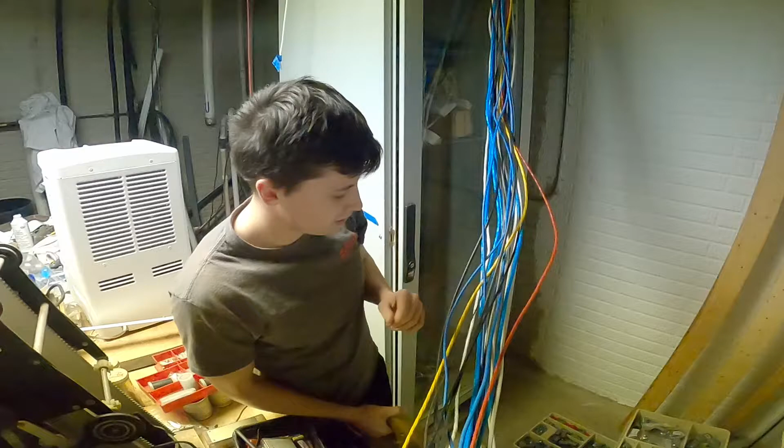I promise I know what I'm doing here.

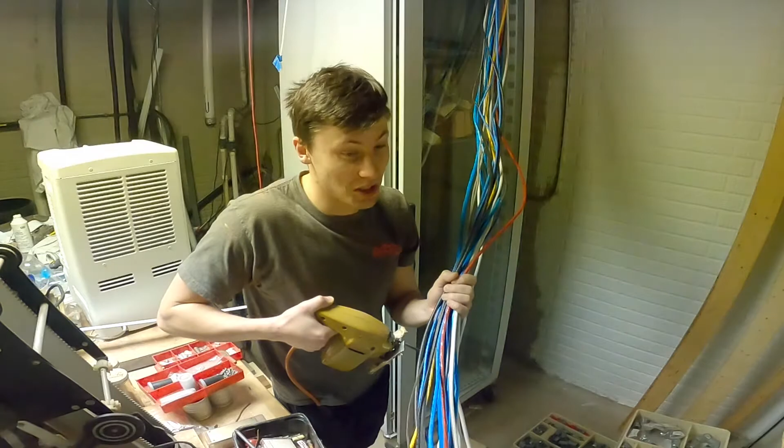Okay, so we're headed down to the basement, coming down the stairs.

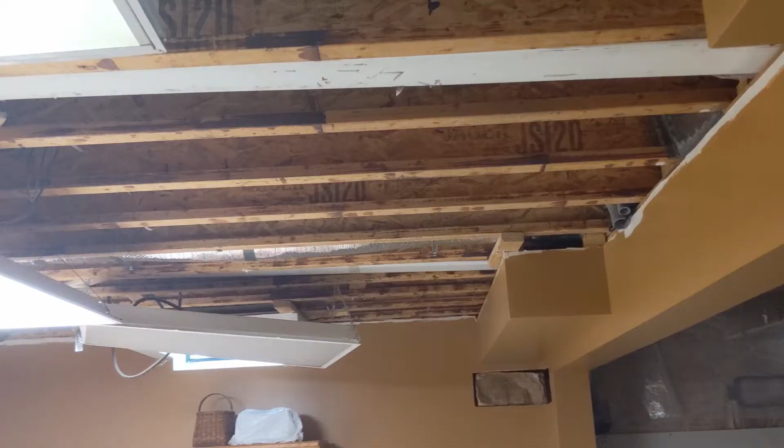We've finished about half of the basement, or most of it. We don't have the ceiling figured out yet, but the walls are all done, and all the conduits are run for speakers in the walls. We haven't finished this back half, so this back half is a disaster.

But what we came here to see is this heap of cables, and the sump pump. We'll talk about that probably eventually.

So this has got our home audio system. That whole rack, the server rack, will eventually make its way to there, and this slot, as you can see, we've kind of framed it out so that can slide in there.

So there's audio cable run to most of the first floor, but my dad wants to run cable all the way up to the rooms on the second floor.

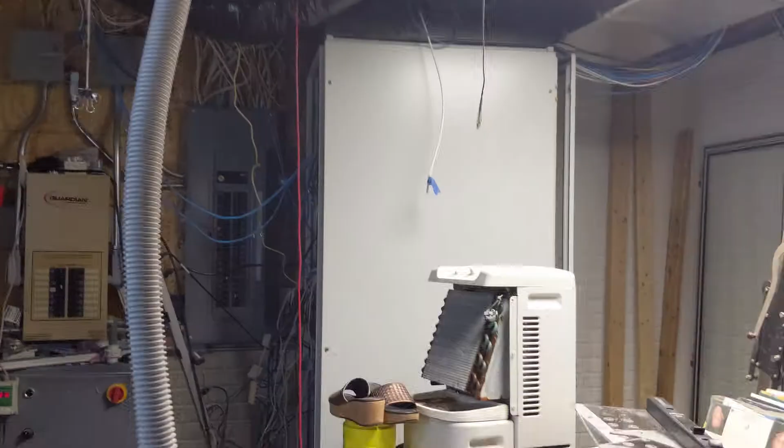So we essentially have to have a conduit that runs from this box on the ceiling all the way across the basement, keep coming all the way through here, and then poke up through the ceiling. So I'll show you a little bit why and where that's gonna go.

What's up guys, we are back in my sister's room. We're gonna figure out where in this closet we need to take out the drywall, and also do a little bit of work to prep for my dad, who's working on the shelves in here. So we're gonna be prepping for that.

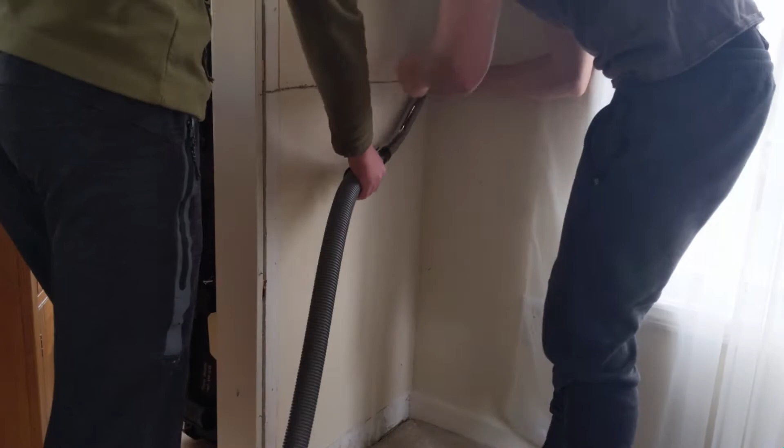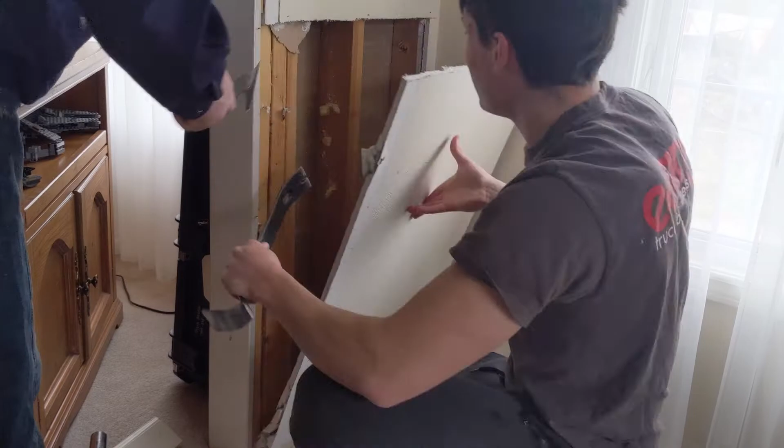So just like that, we got this wall cavity opened up, and we're gonna have to end up drilling holes in here, and that's where we saw in the basement down there, where that's gonna come out by that joist.

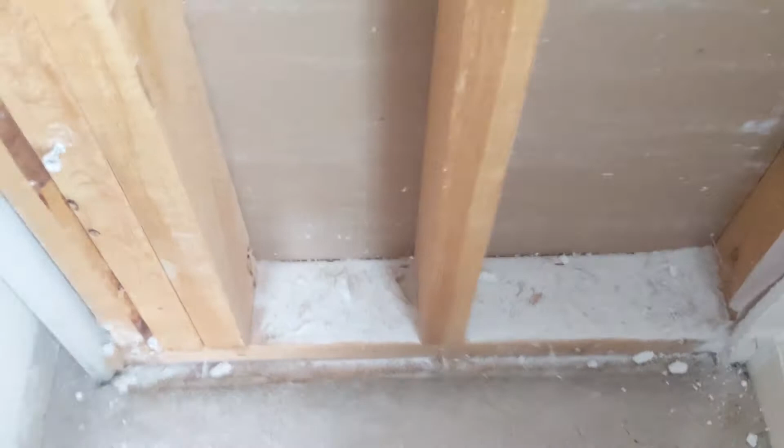So the I-beam should be right about here, right under us. We won't actually be able to see that until we drill, but that's where we're gonna be poking out. So should be good, and then we'll run all the way up into the closet up there.

So these are the shelves. It'll be pretty, this will be in the center of the closet, so I'll have some nice storage space in the bottom. You can see there's a bunch of holes, so you can have different shelf heights and adjust them to however you need. So that'll be pretty cool.

The bottom is deeper, this goes almost to the full depth of the closet. I think the doors will be about here. This is cut so that you can reach your hand in, this will allow you to get to the hanging stuff.

So I think he's planning on having two hanging poles here for hanging clothes, for just like your t-shirts, your pants, and stuff like that. And then having a longer one here for dresses and stuff like that for her. So it'll be pretty sweet.

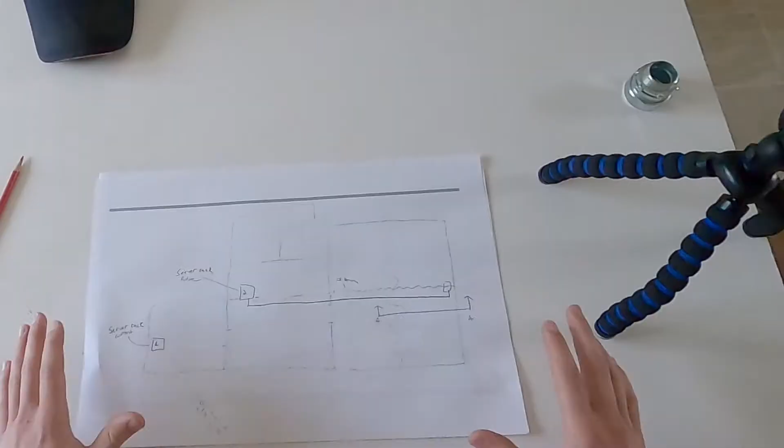We're kind of doing this now, the whole closet and everything, and poking open the home audio conduit stuff, because we're already poking through the walls. It's something my dad's been looking at doing, running into the attic so it can get to all the different rooms.

Got a quick drawing to kind of show this project a little bit. This is the floor plan for the basement. We go back to the server rack, which is what I showed before.

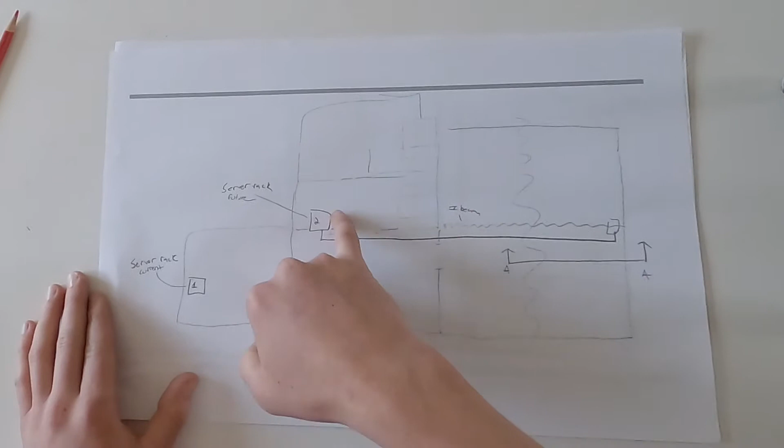Where it is now, and then we're going to move it to here eventually. So we need a pipe essentially to run Ethernet cables and audio cables from this server rack all the way to here, and then that's where it's going to poke up and go upstairs.

So we come to the basement here where I was showing. This here is where it's going to turn and make a 90 up. Each one of these dots is representative of a coupler.

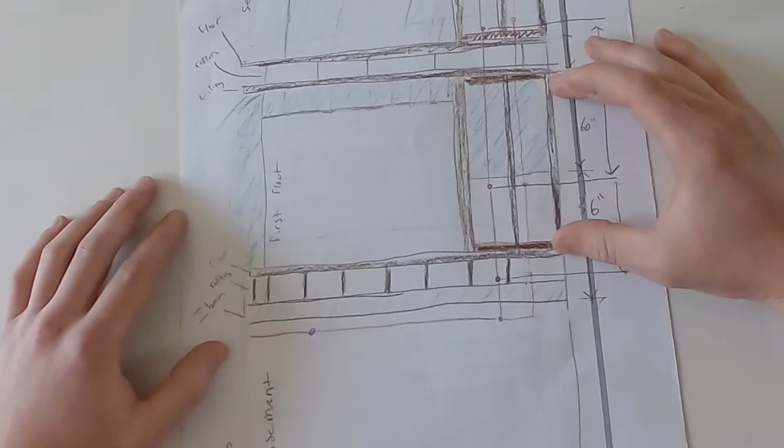We have the first floor. This is the part of the wall. This is the 3-foot section that we have the drywall off of. And then this is my sister's closet here with the section of drywall we have out currently. It's like a 7-foot section.

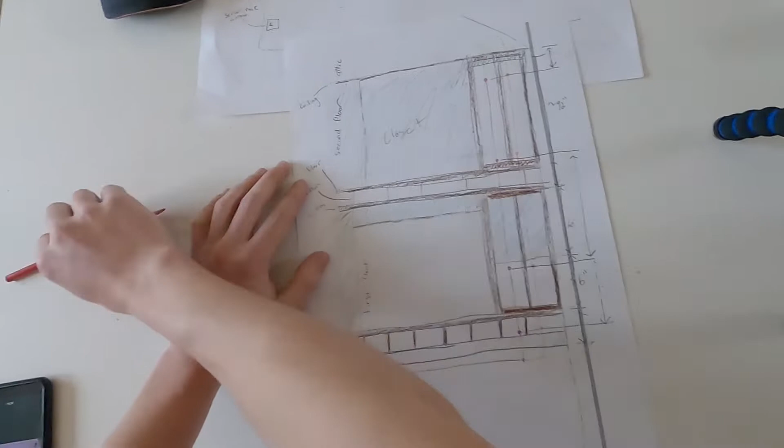I have some measurements, I started to take some, but just to get an idea, from the basement we're going to have that conduit running several different lines. I actually think we're going to have enough space to have another run here.

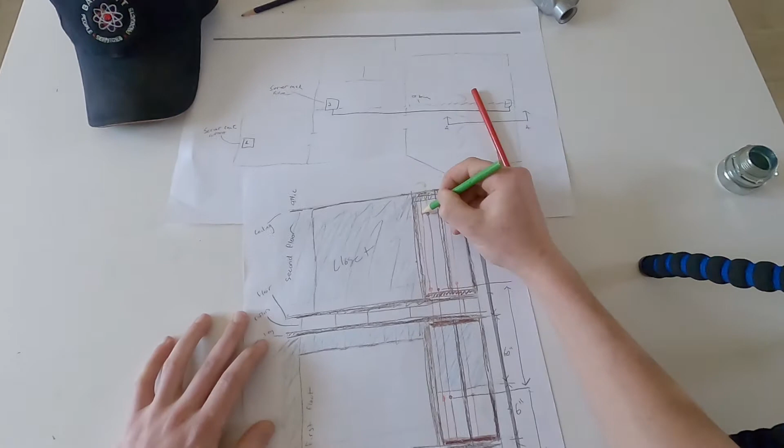And then each one of these dots - I think we've decided we're going with 2-inch conduit. Oh, that needs to be green. So the red is representative of metal conduit, and the green is plastic.

Once we get up into the attic, we want to have plastic, because even though the attic is insulated, we don't want that heat from the conduit to travel back in. And we're also going to have to seal that conduit off where whatever wires are coming out, so that no air is drafting back down to the basement or wherever.

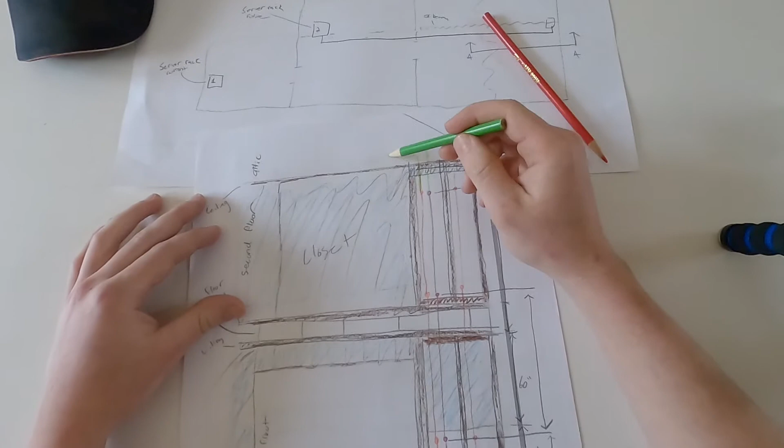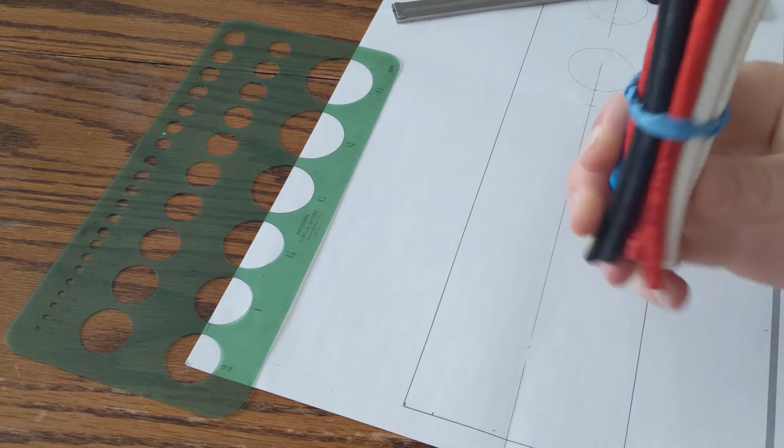But this is just the general idea of what we're going for, that we can get the audio cable up into the attic so we can go back into the rooms. So according to my father, every single room needs to have this many cables running to it upstairs.

So the black is RG59. Coax cables - there are various types: RG59, RG62, RG6. There's tons of them.

4 to every room. 2 to opposite sides of each corner, such that they can be used for RCA connections to communicate low power signals to amplifiers. 2 coaxial on one side of the room, 2 on the other side, because you have 2 sides to every room.

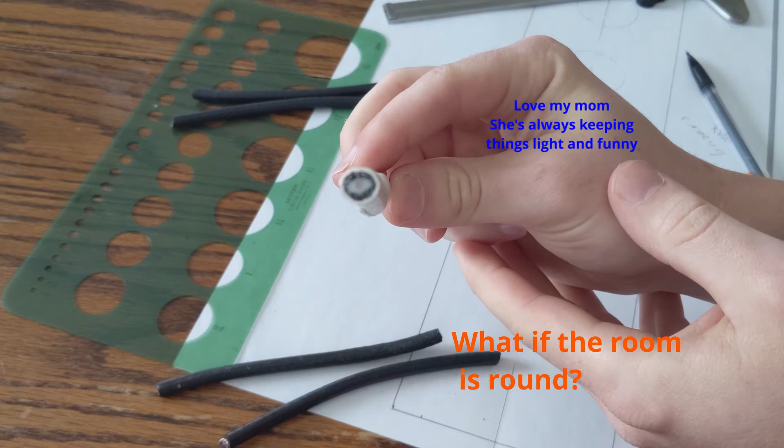So then we have this white coaxial cable. That is RG6, for digital. It is mostly set up for digital video signals, but can also be used for analog sound signals like subwoofers.

The red is Cat 6. This is for your local area network.

And then the blue, which is for 4 cable audio - in other words, 2 cables left, 2 cables right. So you run the big run using 4 cables in one, then when you get near the speakers, you split that cable.

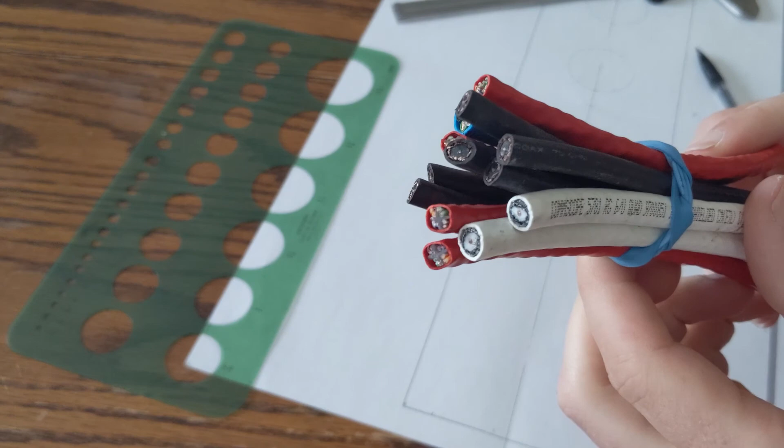The funny thing is. What is the funny thing? The funny thing is that this is a need we've lived without for 22 years.